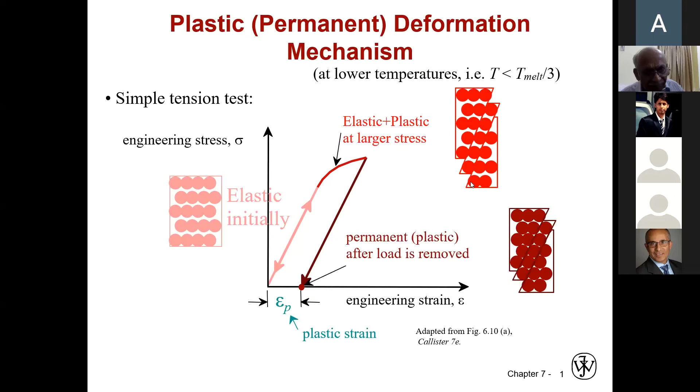We define yield stress as the stress at which noticeable plastic deformation has occurred. But that is a very arbitrary definition. That means that's something we can measure. It doesn't mean that there is no plastic deformation before we can measure it.

So we assume that if the plastic strain is 0.002, the corresponding stress value is the yield stress. So if you are looking at a 2-inch sample, it is a very, very small deformation.

But actually some materials start yielding from the very beginning, like aluminum, copper, gold, polymers. So this concept of yield is only valid for materials with metallic bonds. It doesn't really make sense for covalent bond or ionic bond materials.

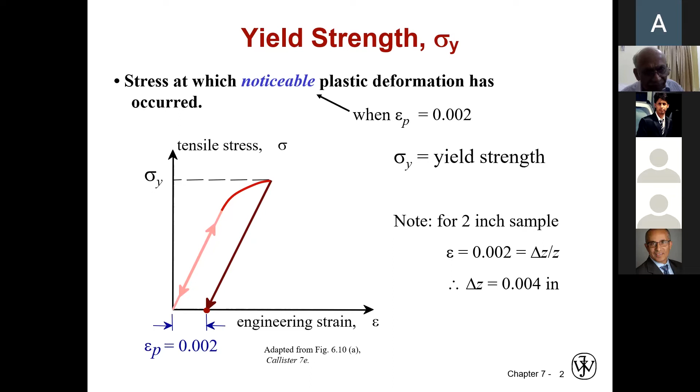This is something my students always get confused about. So if we introduce 0.02 meter plastic deformation to a 1 meter long steel rod by stretching it beyond its yield, the new length is 1.02 meters. Then we decide to return it back to its original length by pushing it back to 1 meter.

So essentially it's just like a linear elastic system. At the end, the bar has the original length, so the final length is the same in this process. So what would be the plastic strain for this bar? Can you write your answer in the chat?

You know, strain is deformation, 0.02 meters divided by 1, right? You can assume that there is no elastic deformation. So what would be the plastic deformation in the final sample, final bar, which I start with 1 meter, I finish with 1 meter.

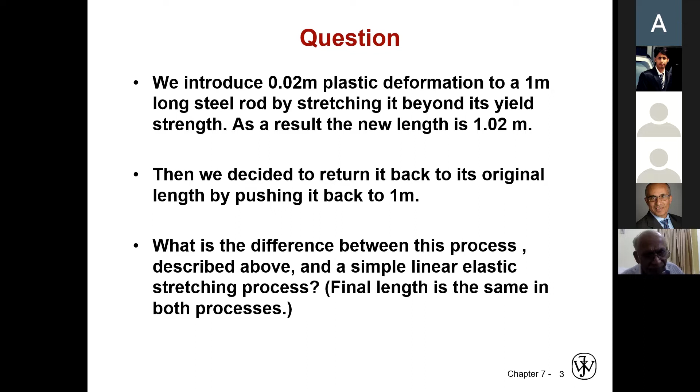From outside, they look 30 years old, but then they die the next year because the deformation in the system, the degradation, is irreversible. What you see doesn't matter, the irreversible process is what matters. So plastic strain is irreversible. For the plastic strain to happen, you have to have, as I said, a defect in the system. If there is no defect in the material, there cannot be plasticity.

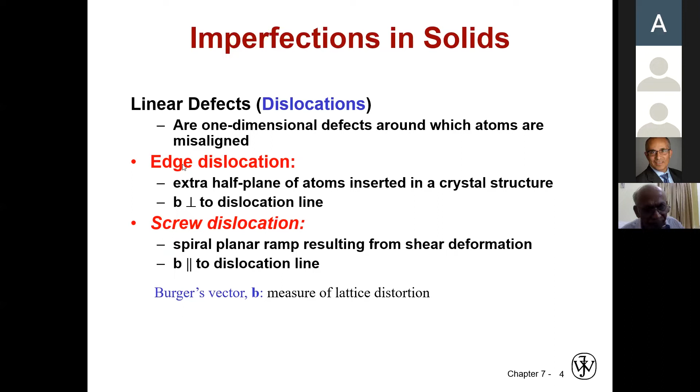You can only have elasticity. We call the linear defects dislocations. These are lines of missing atoms, and they can be an edge dislocation or a screw dislocation.

They look like this, each blue circle here represents an atom. So for example, in this row I have 7 atoms, and these atoms are in good order. Here I have 7 atoms, but in this row I have 6. So 1 atom is missing here, and as a result there will be what we call a dislocation here.

As a result, the atoms between these two atoms will be under strain, because here they are at their equilibrium spacing, but here they cannot be in equilibrium spacing because there is 1 atom missing. So we call this row of atoms missing an edge dislocation.

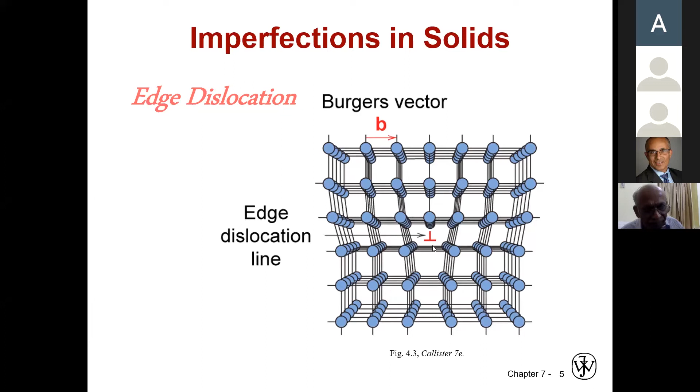I don't think this will move here, it was actually a video. And then when it is subjected to shear, this top section will move with respect to the lower section along what we call a slip plane.

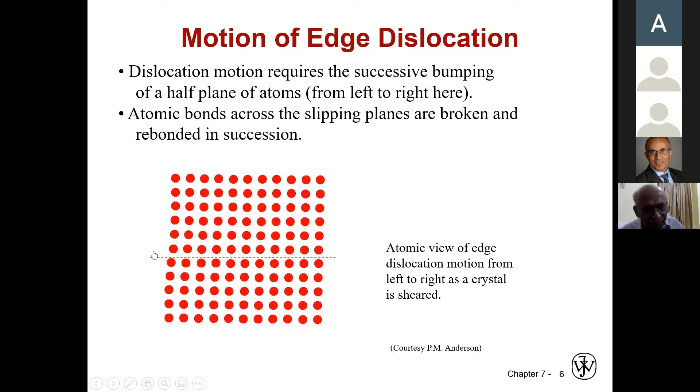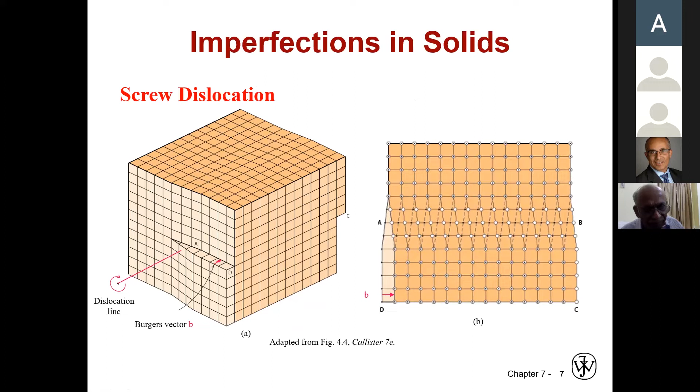Now the screw dislocation is essentially when the lower cube is twisted, or the upper cube is twisted with respect to the lower cube. That defect is called a screw dislocation, and it looks like this.

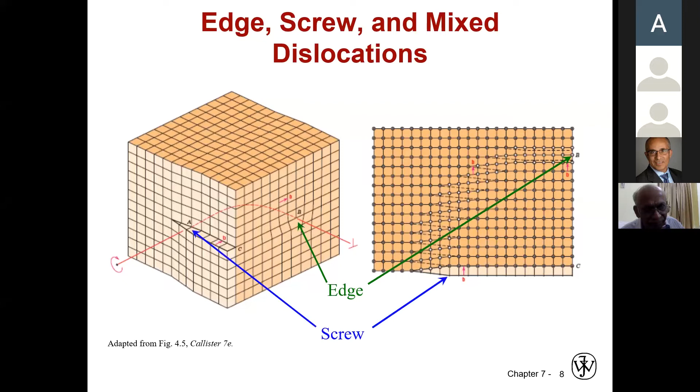And of course, most of the time you have edge dislocations and screw dislocations at the same time.

Now this is for metallic bonds, and dislocation motion is easier because the metallic bond is a non-directional bond and close packed. The valence electrons don't belong to any of the ion cores, so it is very easy for these atoms to move along

any slip plane. But when you have a covalent bond, as in ceramics, you don't have this free sea of electrons, they share their electrons. So the motion is very difficult. The only way this can move is it has to break bonds with all neighbors, so as a result, ceramics are very brittle materials.

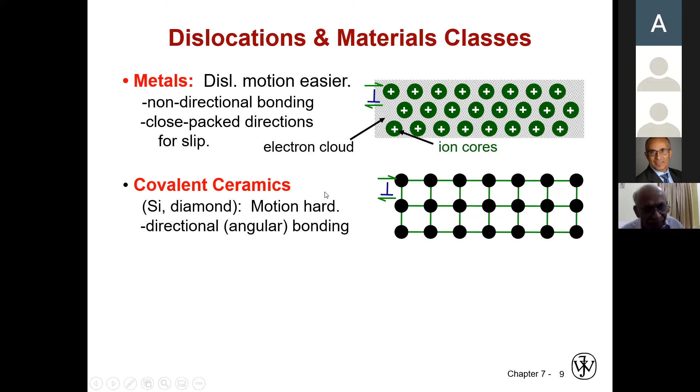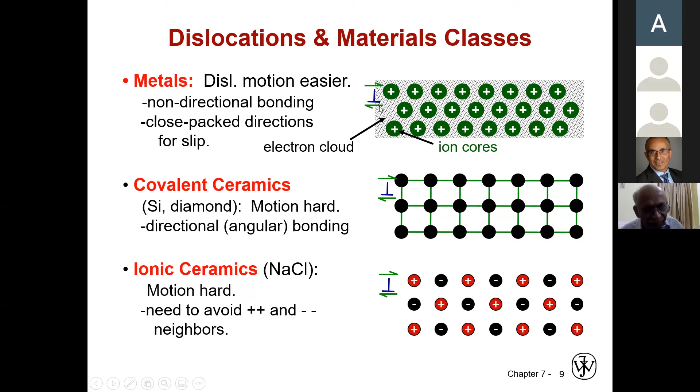They don't bend. The same is true for ionic bonds, because again you don't have a free sea of electrons, the charge prevents it from moving. As a result, plastic deformation is more difficult because they share their electrons between two atoms. Here, everybody shares everybody else's electrons.

So essentially, if you have this sample, this will be your slip plane. If you subject it to shear force, we hold it from here and apply shear, this block will move along this line. Well, you might say, why doesn't it break from here?

Well, because here you have, 1, 2, 3, 4, 5, 6 bonds, and here you have 5, 1, 2, 3, 4, 5. It is easier to break 5 bonds than 6 bonds. This block will move 1 step to the right and make new bonds with new neighbors, and then finally this piece will come out.

Because atoms want to exist at the minimum energy state. Like this atom is in a minimum energy state, it has neighbors in each direction at the equilibrium distance, and there is no strain, stress, or force on this atom. In nature, everything wants to exist at the minimum energy state.

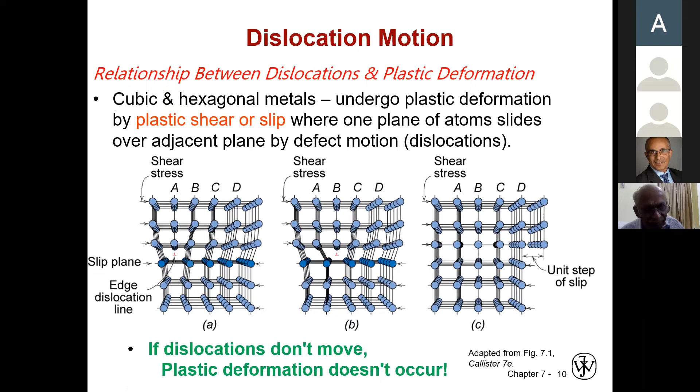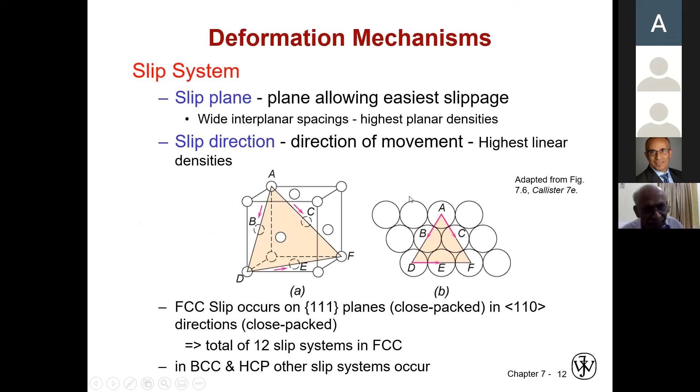So there are many slip systems at the atomic level, in 3D, and it is easy to formulate this process in a single crystal level. But however, there are billions and trillions of atoms, trillions of dislocations in the system.

As a result, we have to do macro scale testing to get the properties, because so far we have not been able to model the system as a thermodynamic system and then analyze it and calculate the stress-strain response.

So for a single crystal, we just say when the critical stress, the shear stress level, exceeds a critical value, this resolved shear exceeds a critical value, and this block will move along this block.

So in plasticity, we need several things for plasticity to happen. Number one, there has to be a defect in the system - if there is no defect, there cannot be plasticity. Number two, there has to be a shear stress - if there is no shear stress, there cannot be plasticity.

So if I take a system with defects, but just put it under water, 10,000 meters under water, under hydrostatic pressure, there cannot be any plasticity. There has to be shear stress, and the shear stress value has to exceed a critical value to break the bond between the layers. This is what we call yield stress at the macro level.

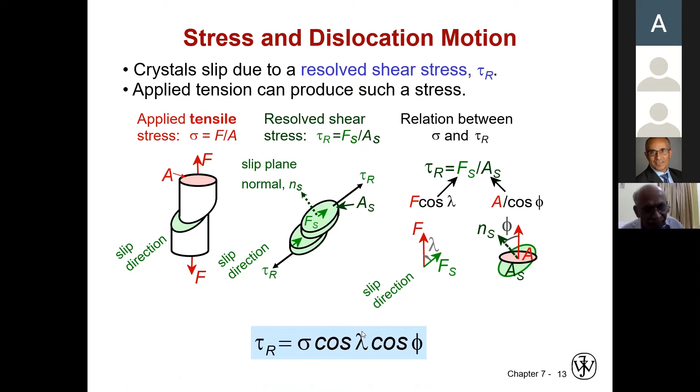And of course, the motion of dislocations, the stress on the system can be calculated from simple transformation equations easily. So this is the resolved stress, tau R, tau CRSS is the critical resolved shear stress.

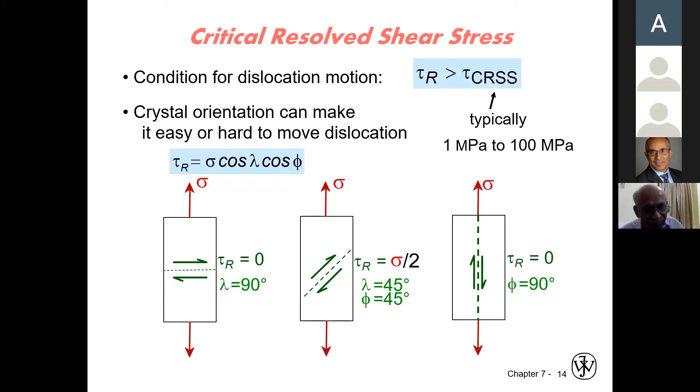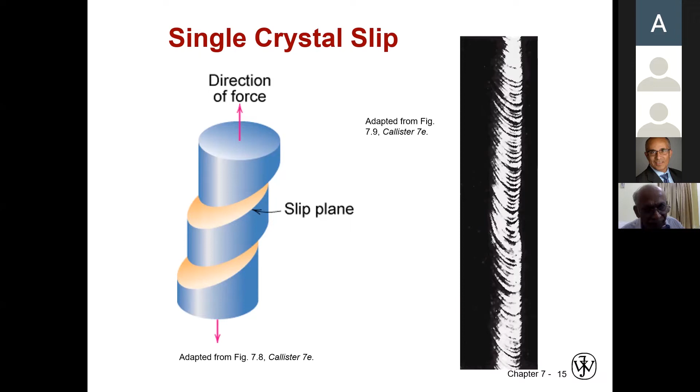What we observe as plastic strain, or change in length, is actually just motion. If you think of it, you have the diameter and the initial length, and then these blocks move with respect to each other, and you think it is longer now. Actually, you measure it as longer because there is a relative deformation. It's like if you take a deck of cards - the length of each card is constant, and when you apply a shear load to this deck of cards, the new length of the entire card system will be longer, but the actual length of each card is still the same. So you observe it as longer because they slipped with respect to each other. That's how it looks under a microscope.

We can do these calculations for a single crystal, but of course we do not have single crystal systems in real life. We have polycrystals.

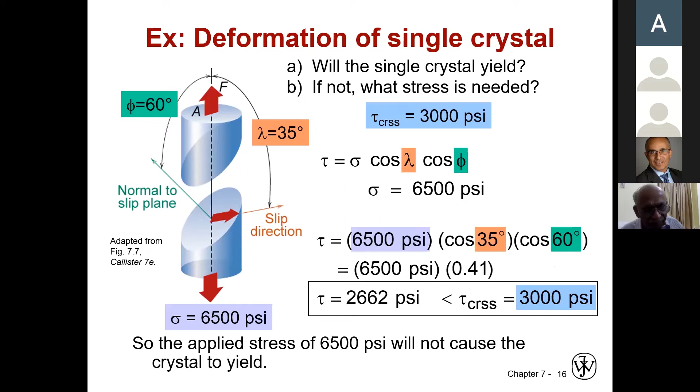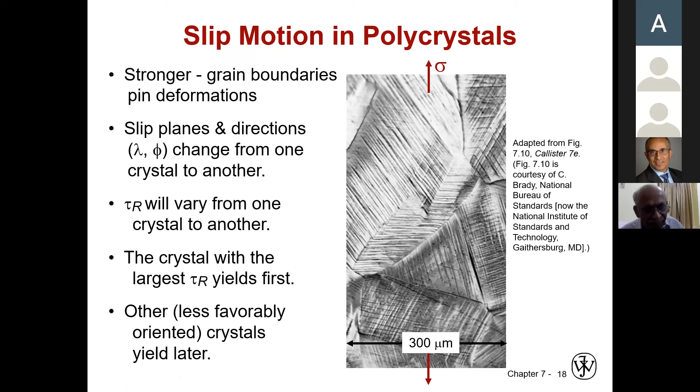When you apply shear, the layers will move with respect to each other, but of course they will also try to cross over these grain boundaries, which makes it difficult to move. As a result, having more grain boundaries makes it more difficult for the dislocation to move, and as a result, yield stress will be higher. So a material with smaller grains will have a bigger yield stress.

Of course, we can have anisotropy in different directions - we can have different yield stresses. We can introduce anisotropy by loading the system, like after rolling it, grains change their shape, and now their yield stress will be different in each direction. Like the rolling we use, for example, to make automobile bodies or any steel stamping plant.

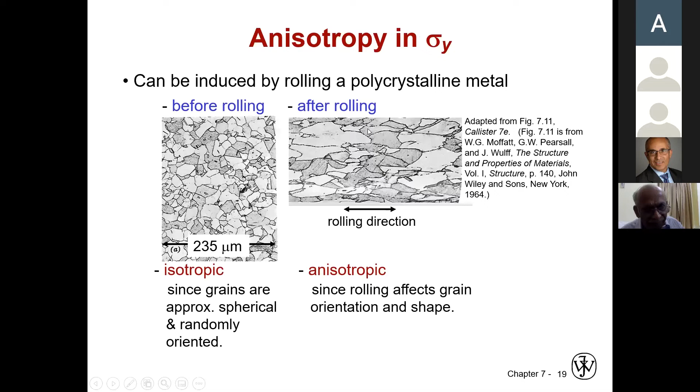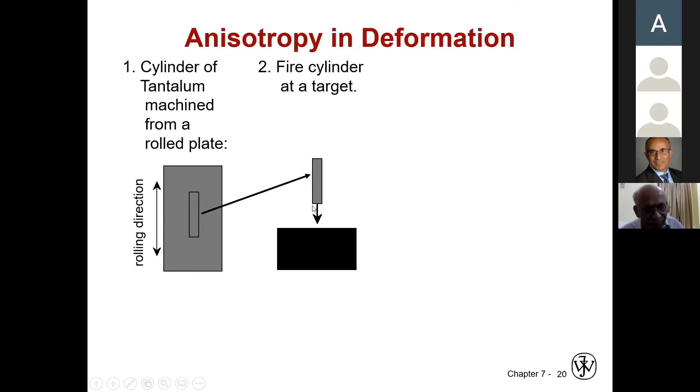Now, if the material is anisotropic - for example, here is an anisotropic material - you fire a cylinder at a target. This is a rolled plate, but the sample is a cylinder. However, it was rolled, so the bullet was made after rolling it. Now, if it were isotropic, the deformation of this bullet should be circular. But instead, after you fire it, the bullet ends up without a circular shape - it has an ellipsoidal shape, because it doesn't have the same properties in, let's call it, the X and Y direction.

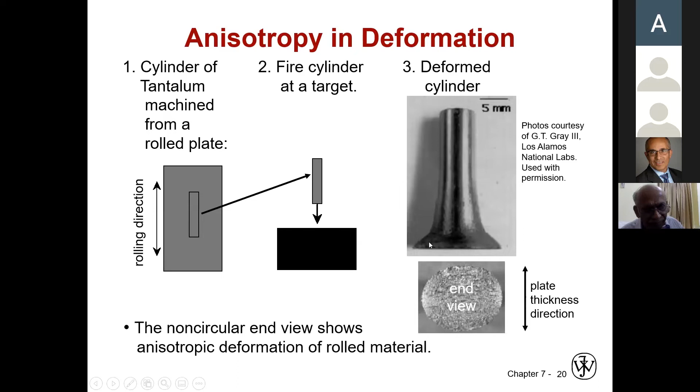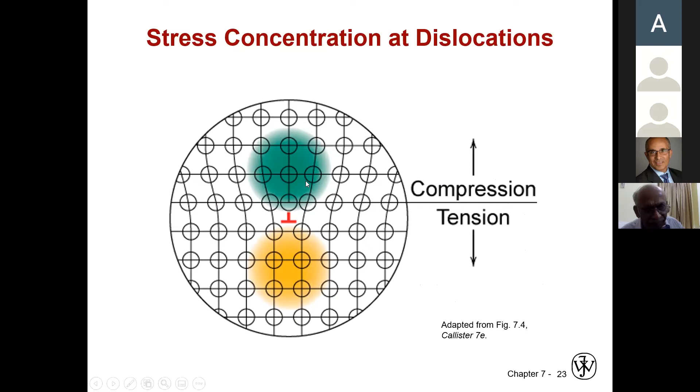So, of course, by changing the grain size we can increase the yield strength, or by adding solid solution, mixing it, or compression, because we have stress concentration at these dislocations, and then we can strengthen the system by essentially using fillers.

Now, this plasticity also introduces something called length scale in materials. What does length scale mean? It's easier to explain it here.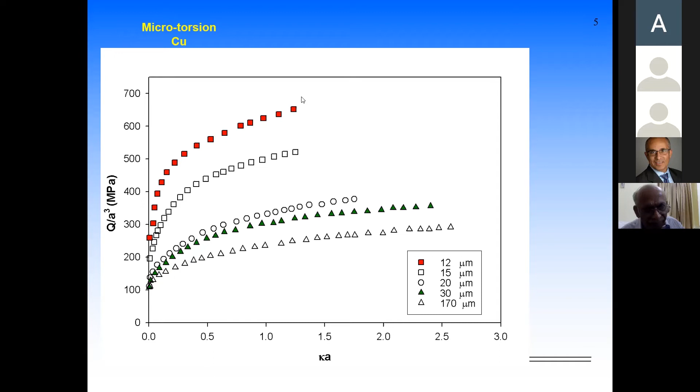This is called length scale. Our theory of plasticity applies if the system is bigger than a representative volume element. If it is smaller than a certain size, or the strain gradient is very large in the system, then the theory of plasticity formulation has to change.

Here is another example for micro hardness testing, and another for micro bending of a thin film. This is the normalized moment applied on the thin film, the maximum moment, since it's a simply supported beam. So the maximum moment is in the middle. So this is the moment.

And this is the surface strain. H is the thickness of the thin film, the uniform thickness of the beam. When the beam is 12.5 micrometers, you get these data points. When it is 50 micrometers, you get completely different data points. As a result, this has to be represented in our formulation, meaning I cannot use traditional theory of plasticity, because it does not have a term for the length or size of the sample.

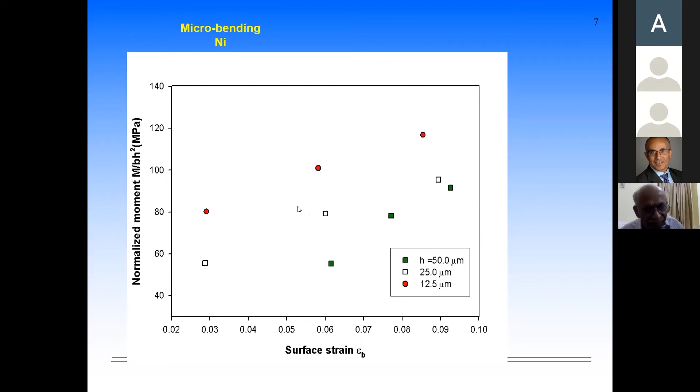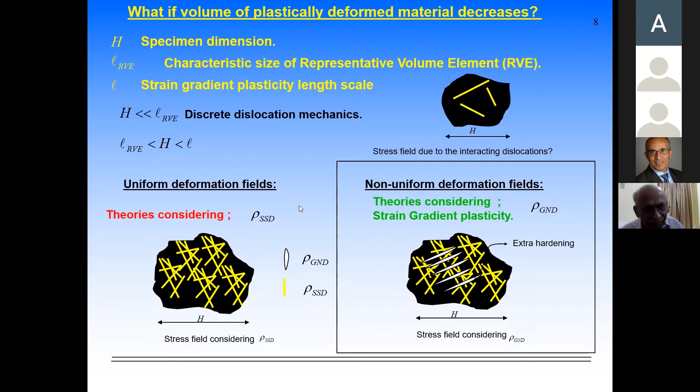The way we traditionally introduce this is by considering that yield stress is proportional to dislocations. When there is no length scale, those dislocations are called statistically stored dislocations—these are the regular dislocations we know from theory of plasticity. But when length scale becomes an issue, we call the additional dislocations geometrically necessary dislocations. These dislocations are created in order to accommodate the deformation. As a result, the smaller the sample, the higher its strength, the stronger it is.

So, for example, let's go to the simple Taylor's law for yield stress or flow stress, whatever you want to call it. This is, of course, true only for a single crystal. Here, rho is the density of dislocations, B is Burgers vector, mu is shear modulus, and alpha is an empirical coefficient, which we obtain from testing. Why do we need alpha?

Again, because theory of plasticity is an empirical theory. It is not based on science, not based on any direct physical mathematical calculations. Why? Because we don't have the mathematical formula and we don't have the tools to be able to do the calculation. So we do an experiment to get this alpha.

Now, when the sample becomes very small, we modify this dislocation density by adding rho g, the geometrically necessary dislocations. As a result, in classical plasticity theory, flow stress or yield stress is a function of plastic strain, which is a function of the statistically stored dislocations. Now, when the length or size of the sample gets into the picture, because our system is smaller than the representative volume element, or the gradient is very large, then we use strain gradient plasticity theory.

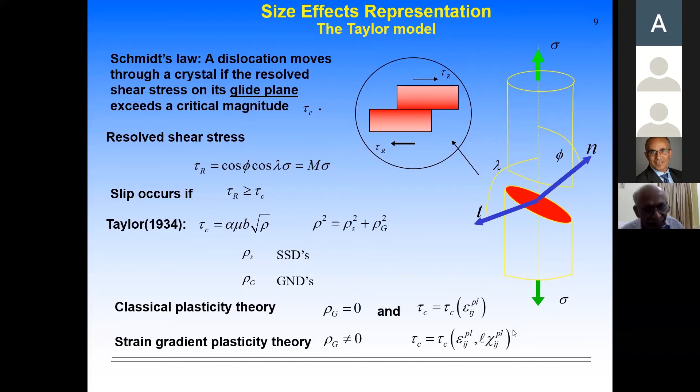The yield stress is a function of plastic strain, then length scale of the material, and then another factor, which is a derivative. This term is the derivative of strain. Strain is the derivative of displacement, so this is the derivative of strain—that's why it's called strain gradient. So this term comes from the strain gradient.

Now, there are many theories to handle this strain gradient plasticity. One of them, maybe the oldest one, is Cosserat continuum. In regular continuum, if you take a stress point, these shear stresses balance each other. So if this is y and this is x, tau yx is equal to tau xy, so that you can satisfy moment equilibrium with respect to the center.

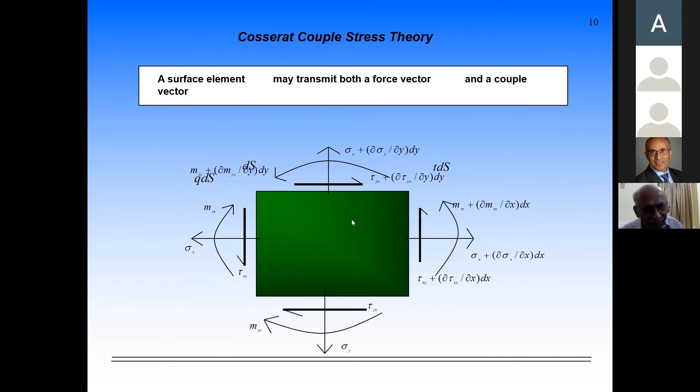In Cosserat continuum, they are not equal to each other because there is an additional moment on the system at the point, in addition to the stresses, and these are called distributed moments. This is called Cosserat continuum, where tau yx is no longer equal to tau xy.

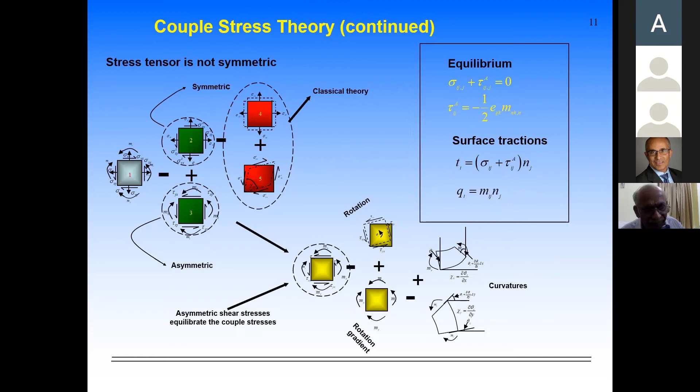So essentially, this is the classical theory, but now we also have moments in addition to surface tractions, which we have in the classical theory—we also have surface moments. Mij is the distributed surface moment. And as a result, shear stresses on the faces are not equal to each other.

So when we write the formulation, the general theory, now the relative strain—this is our traditional continuum strain, and then this is the relative strain. But however, now I have rotation in the system because of the moment.

As a result, my energy term, which I use to solve for finite element method, the classical plasticity will only have this term: constitutive matrix, strain tensor. But now I have gradient of strain, a new constitutive tensor. And then of course, this is the surface tractions, and this is the surface moment. So this is how we formulate if there is a length scale effect on the system.

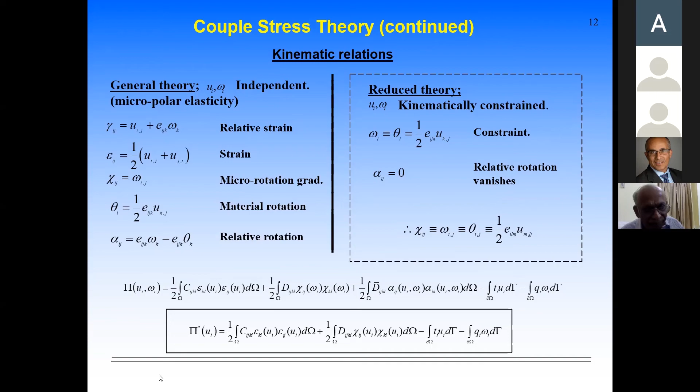Hello sir, we don't get you, please repeat. What is it that you don't get? I don't know, sorry sir.

I had a doubt. We have shown slip lengths in a micrograph. Slip planes in one of the microstructures, right? One of the micrographs, yeah we have slip planes. Whether they are slip planes or twin planes, do we have any way to distinguish them? Well, if you use a microscope, yeah. I mean, distinguish them in calculations or by observation in the microscope? By observation, microscope, yeah. There are people whose entire professional career is trying to see dislocations using a microscope. They have their own conferences and everything. It's a field by itself. Okay, I had a doubt whether it is a slip plane or a twin plane, so that's what I was asking.